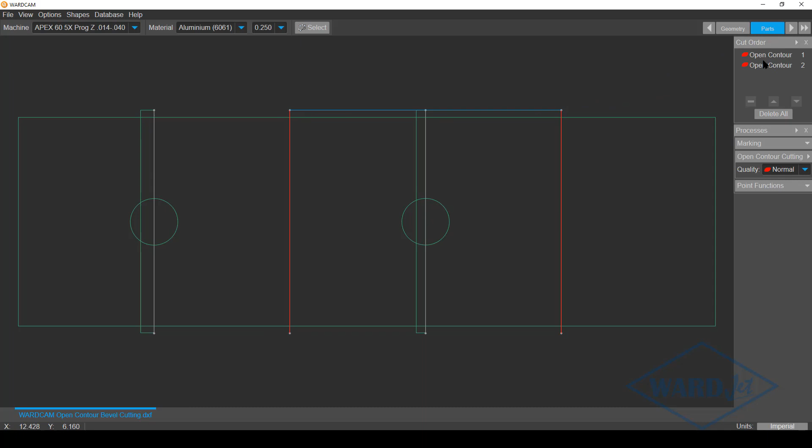And then we hit our next button, and I've got my Apex 60 5-axis programmable Z machine. Since I don't want to necessarily have the height setter coming down in a hole or off the edge of the material, I'm doing aluminum 1/4-inch, and do my open contour cutting for my vertical cuts. So left click, I've got those in my cut sequence here. Hit my next button, top left hand corner, click on the auto button, adds all the vertical cuts on all the geometries that it finds.

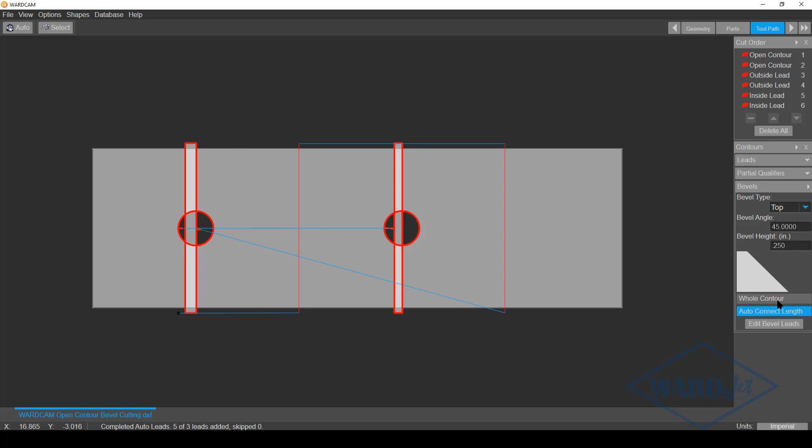We're going to delete the outside cut because we're not going to cut that since we're doing this out of bar stock. Now for the bevel cuts, since these are now closed geometries, I can add a bevel cut to an edge of that, and we're going to do top bevel cuts at 45 degrees, and for the bevel height you want to set this to be either 1/1000th of an inch more or less than the thickness of the material. And for right now, to show you why you want to do that, I'm going to make this the same thickness. My whole contour button right now is not on because I don't want to add a bevel cut to the entire contour. Left click when this edge is highlighted blue, because that's where I want the bevel cut.

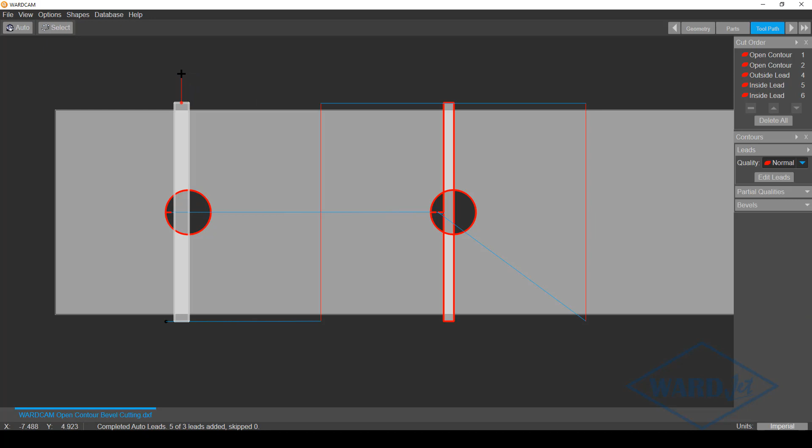Left click that in there, and when the material thickness and the bevel height are the same, your vertical cut and your bevel cut are tied together as one tool path, and you can't delete the vertical portion of it. So the workaround for that, as I mentioned, is just to make that bevel height 1/1000th of an inch more or less than the material thickness. I'm just going to add my vertical cut back on here so I can add a bevel cut to that. Expand my bevel tool. Going to make this .249 now. Left click to lock it in.

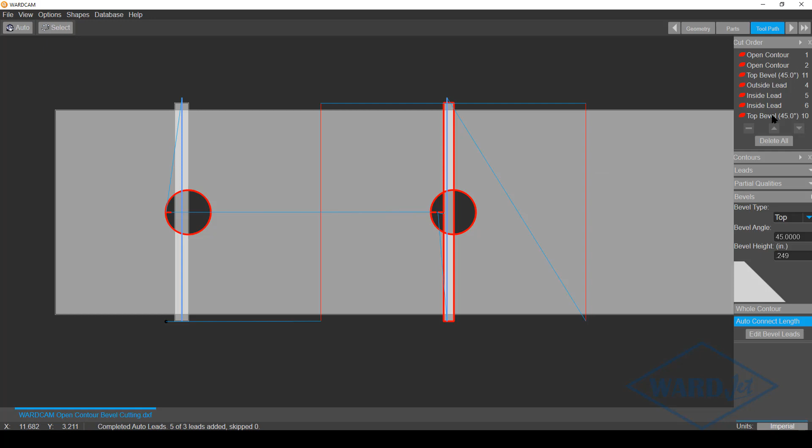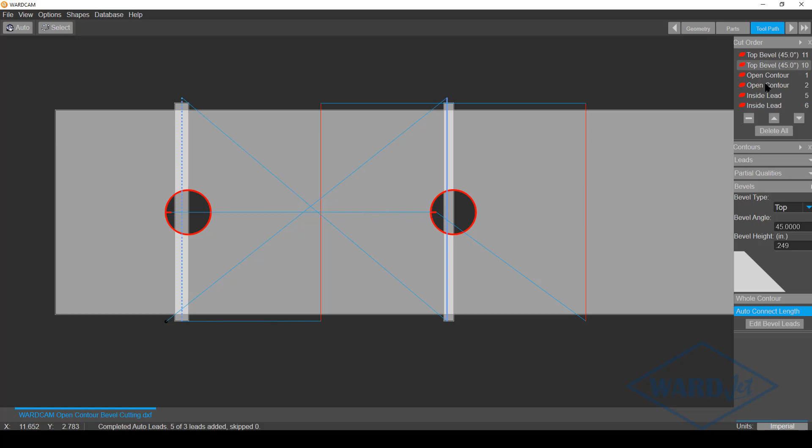And now over here in my cut sequence, the bevel cut and the vertical cut are separate from each other, so I can delete the vertical cut. And then I can do the same thing on the other one. Left click to lock it in there, and then find that outside lead for that and delete that. Now I can go through and reorder my cut sequence here if I want to. I'm not going to worry about that for right now. I'll just move these ones to the top of the cut sequence so it's easier to see in the CNC file. So bevel cut, and so on. So you can put those in whatever sequence you want.

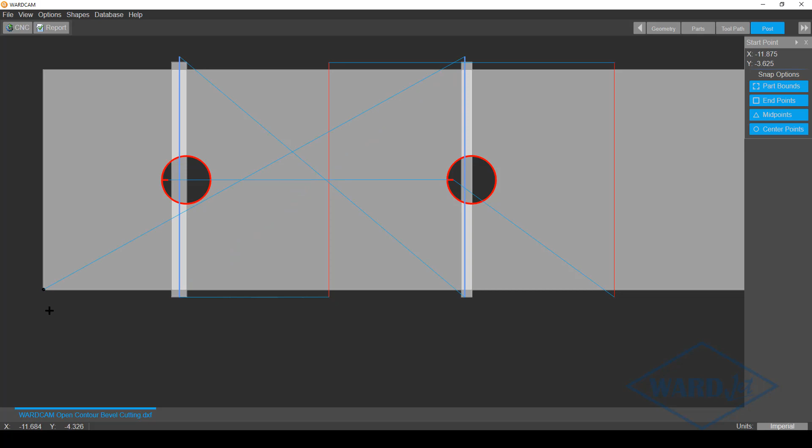Hit the next button. So a thing to remember when you're doing a situation like this where you are cutting it out of a blank of material and you don't have a tool path on that, WARDCAM is going to put the 0 point at the furthest extent that it sees tool path in X and Y. So right now the 0 point is here off the material at the edge of this hole here. So you want to make sure that you move that 0 point to wherever the 0 point on your fixture is going to be. So in this case here, it'll be the lower left hand corner of our part. Then click on your CNC button.

And we'll see here in our file now, we lift up an inch, rapid over, spin around in A and C to that 45 degrees, rapid to our pierce point, come down, do the bevel cut, and then at the end it's going to lift up, rapid over, and come down again to do the other bevel cut, and then go vertical and do all the vertical cutting. Again, you might want to optimize that cut sequence, but that's the basic idea of how you can add bevel cuts to open contours in WARDCAM.